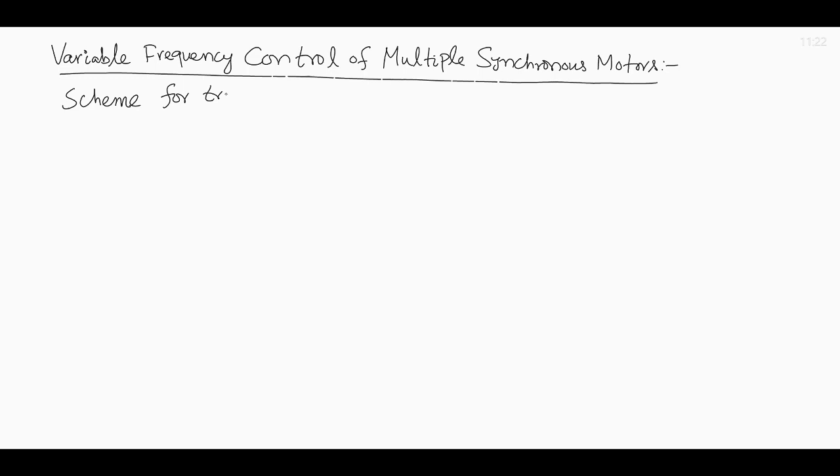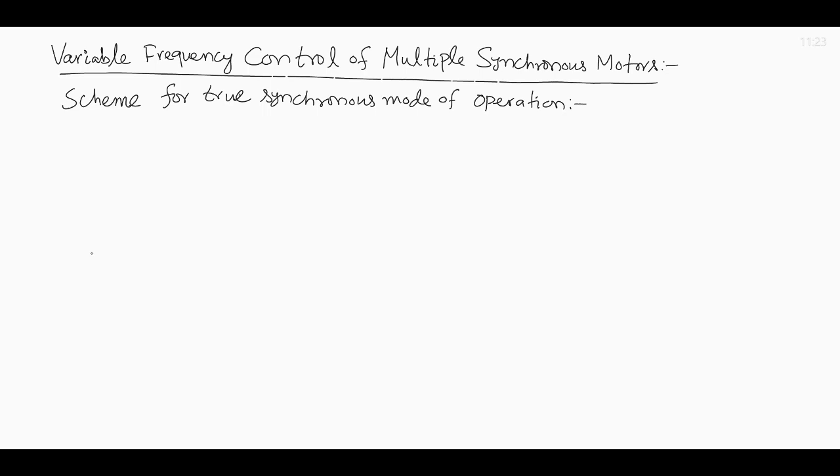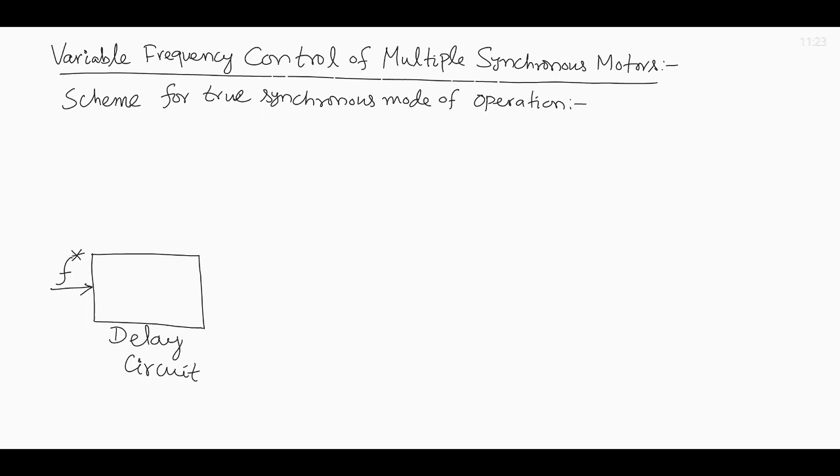So, first we will draw the scheme. This is the delay circuit receiving the command frequency from an oscillator. Delay circuit means it is basically a first order filter, and with the delay it is giving the frequency for control of the inverter.

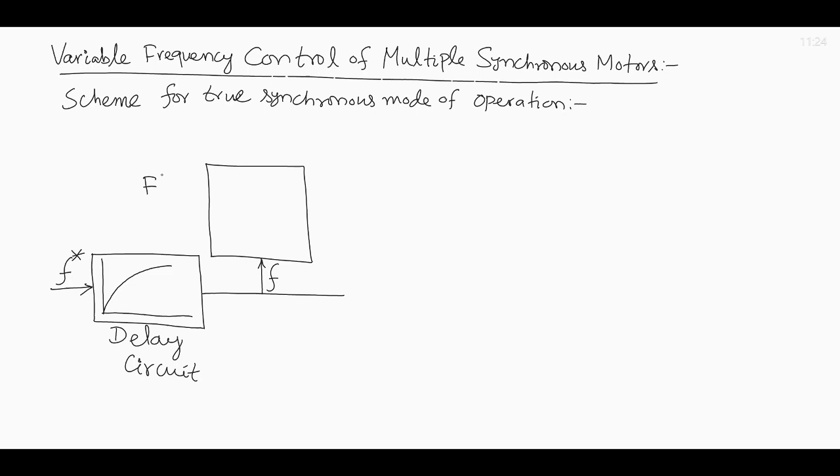Then this frequency f output from the delay circuit goes to the flux control block for V by F control. The characteristic is like this, and with that V by F control strategy, the V star command voltage is generated,

which goes to the rectifier control circuit. That generates the firing delay angle alpha for the rectifier, which takes the AC input and gives the DC output for the voltage source inverter. This is the voltage source inverter, which gets the current and DC voltage from the rectifier and getting the frequency command from the delay circuit. And we have the output of the inverter

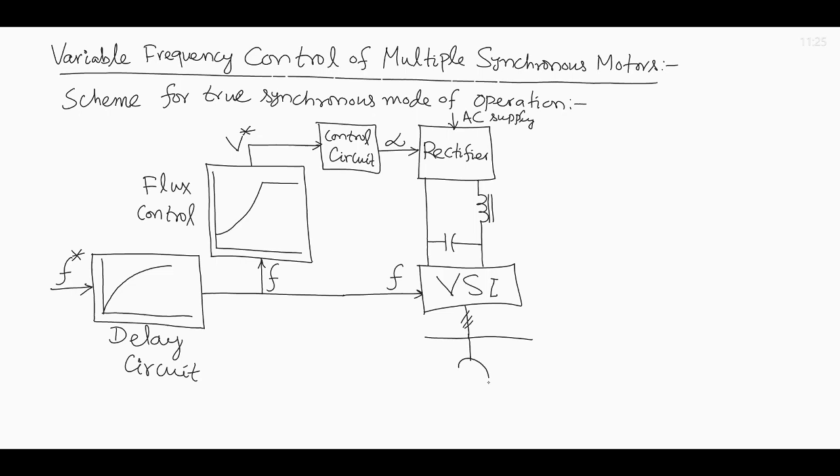feeds multiple synchronous motors like this. So, these synchronous motors can be synchronous reluctance motors, or permanent magnet motors. This is the scheme.

So, basically these multiple synchronous motors are required to run in synchronism in fiber spinning mill, textile mill and paper mill, and they use this scheme because accurate speed tracking is required, and several motors have to run in synchronism. The load is less, so synchronous reluctance motors or permanent magnet motors of smaller rating are used to run in synchronism, and they are controlled in this scheme.

And here the delay circuit, which receives the frequency command from the oscillator, gives the delayed frequency signal to the voltage source inverter, so that the rotor speed is able to track the changes in the frequency, so that true synchronous mode of operation is achieved, and also the voltage has to be controlled.

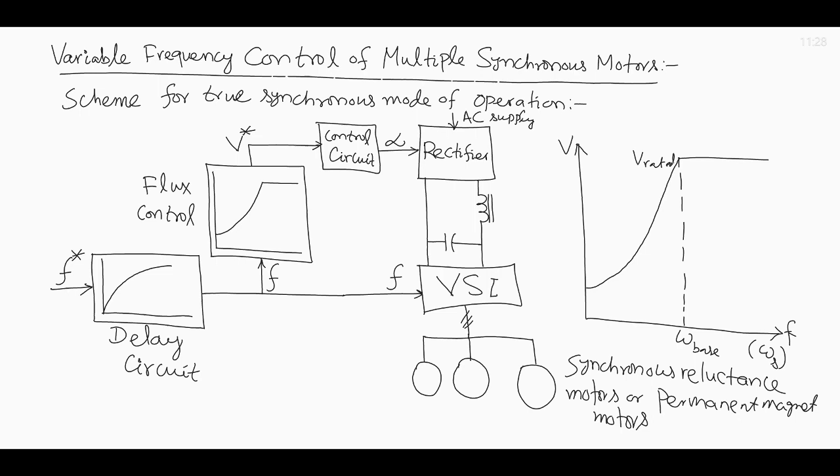The next one we will discuss is load commutated inverter fed synchronous motor drive.

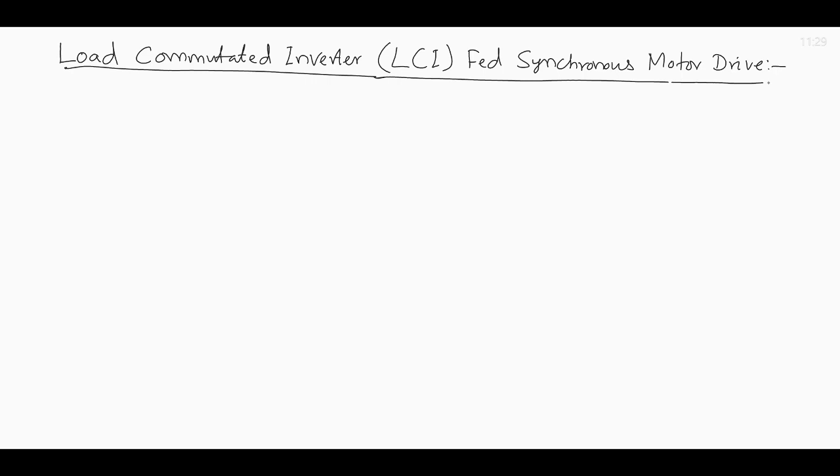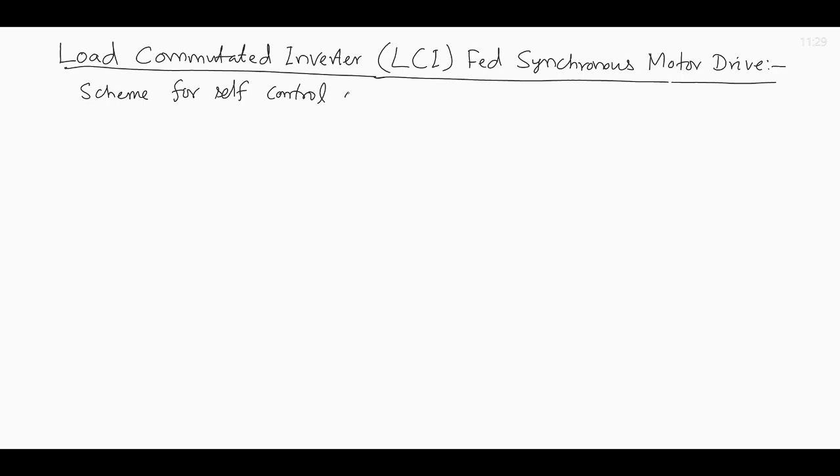Load commutated inverter is abbreviated as LCI, but it is not line commutation, it is load commutation. So we will draw the scheme for self control of synchronous motors with load commutated inverter.

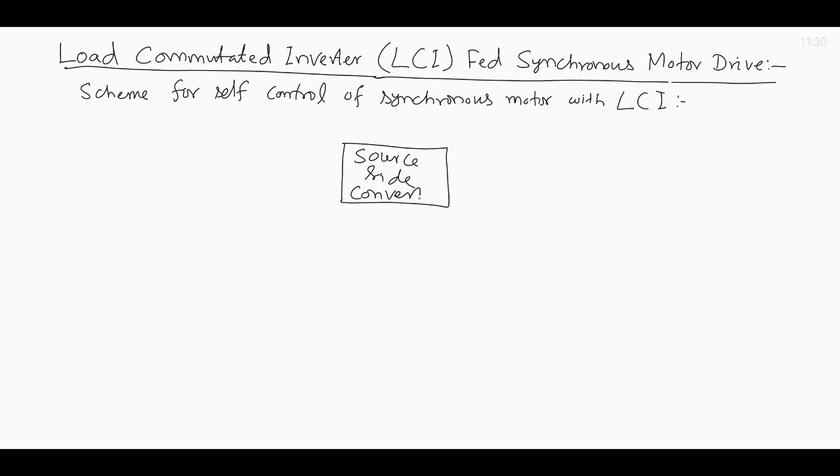We have the source side converter and also we have the load side converter. So, they are connected through a filter or DC link which feeds constant DC link current ID, and this is the AC supply

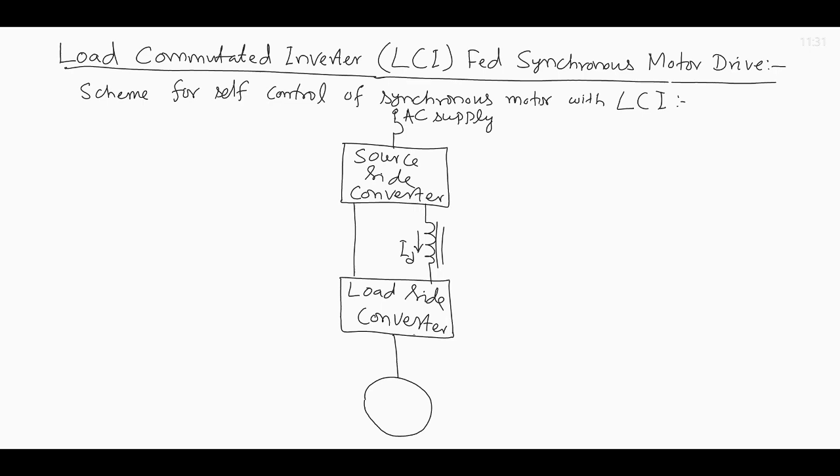for this is the machine, synchronous machine fed from the load commutated inverter, and it is wound field synchronous machine. The rotor gets separate DC supply.

For true synchronous mode, for self synchronous mode operation, there is a shaft position encoder mounted on the motor shaft. The shaft position encoder gives the rotor angle information theta e to the delay circuit.

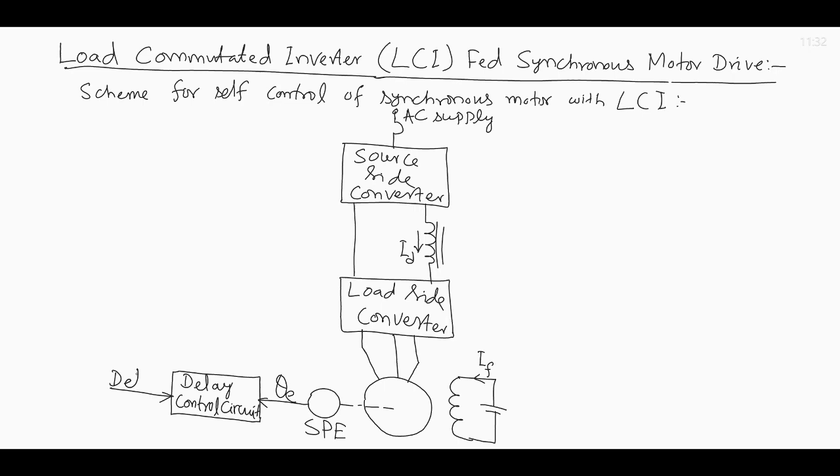Which also receives the delay command, and generates the firing pulses for the load commutated converter.

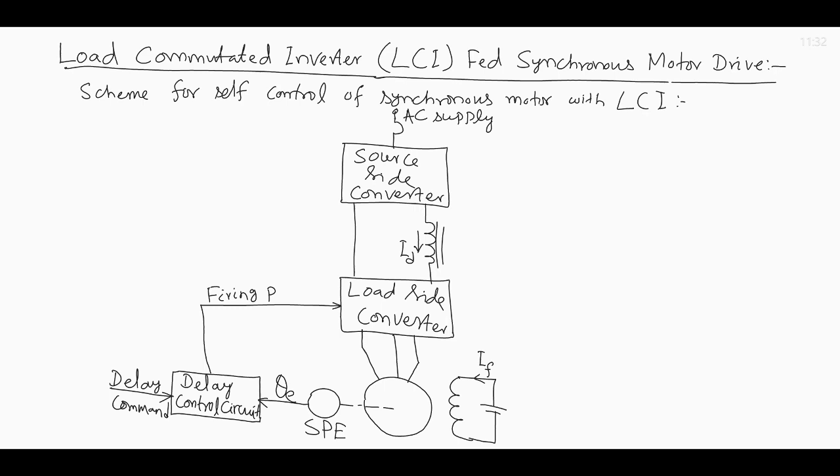For DC link current control, we have a command value or desired value of the DC link current, and we feed the current here. DC link current is taken as feedback and it goes to the control circuit, that gives the firing pulses to the source side converter. So, this is the scheme for self synchronous mode of operation of the load commutated inverter fed synchronous motor.

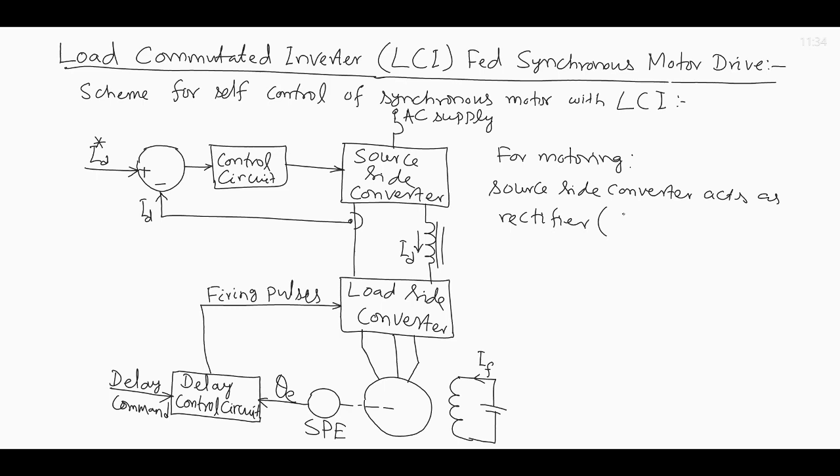So, for motoring operation, source side converter acts as rectifier, AC to DC rectifier. That means its firing angle alpha s for the source side converter is between 0 to 90 degree,

and the load side converter acts as inverter. That means its firing angle, that is alpha L for the load side converter, is between 90 degree to 180 degree. So, it rectifies the AC supply and feeds the DC current ID to the load side converter, and load side converter which is inverter makes it AC and feeds to the synchronous motor at variable frequency.

And here there is a shaft position encoder and delay circuit for the true self synchronous mode of operation of the load side converter. So, with this, the power flow for motoring operation is from the AC supply to the motor via the rectifier and inverter.

When the synchronous machine has to be braked regeneratively, that is generator operation or regenerative braking, the load side converter acts as rectifier and the source side converter acts as inverter. So direction of power flow reverses from the machine to the AC supply.

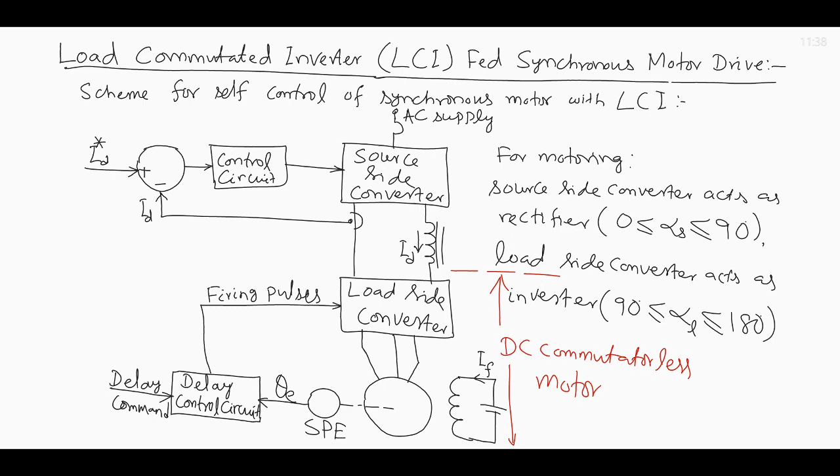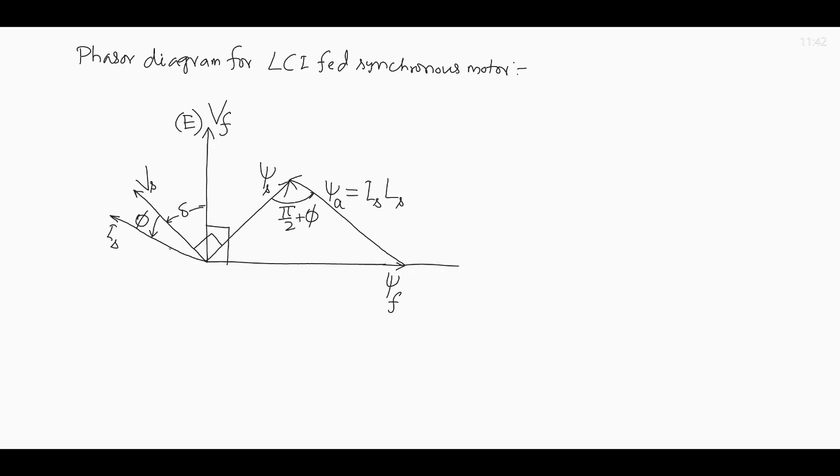The angle between psi A and psi S, this angle, you see, is pi by 2 plus phi, because the angle between psi S and psi A is pi by 2 plus phi. So the angle between psi A and psi S is also pi by 2 plus phi, and the angle between psi S and psi F is also the torque angle delta.

So this angle phi dash, as I have indicated, is pi by 2 plus phi plus delta, and this angle alpha, which I have indicated, is pi minus phi dash, that is pi minus phi dash equals pi by 2 plus phi plus delta, so it is pi by 2 minus phi minus delta, like this. So as I have already explained,

psi F plus psi A is psi S. The psi S phasor, which is rotating at synchronous speed, is the joint action of psi F, which is rotating at synchronous speed with constant magnitude, and psi A, the stator reaction MMF, that is Is into Ls, which is in phase with Is. Psi F is 90 degree lagging behind Vf or E, and psi S is lagging 90 degree behind Vs when the stator resistance is neglected.

So the angle alpha, as indicated here, is pi minus phi dash, and this alpha is the delay angle of the inverter. Alpha is the delay angle of the load commutated inverter.

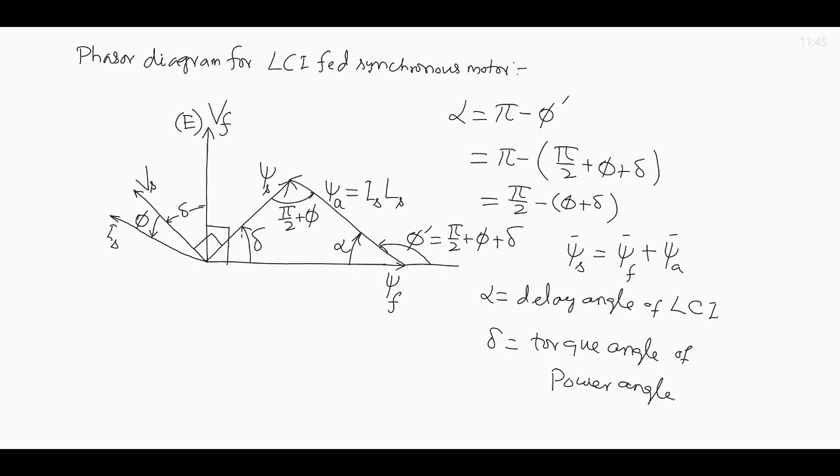Next, we will draw the phasor diagram for regenerative braking at unity power factor.

This is the stator voltage Vs, and opposite to it is the stator current Is, with phase angle 180 degrees. For a generator, the current is opposite to the voltage, unlike a motor, which is in the same phase as voltage for unity power factor. So for unity power factor of a generator, Is is 180 degrees opposite to Vs.

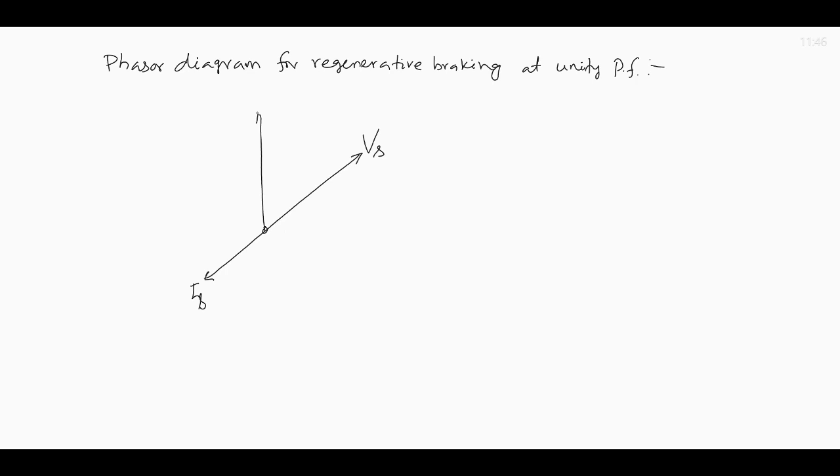Like the previous case, we take the voltage Vf or induced voltage E, which is at angle delta, the load angle, with Vs. The flux linkage psi F is lagging 90 degrees behind Vf, and flux linkage psi S lags 90 degrees behind Vs. This is psi S.

So flux linkage psi f for the field flux, which is rotating at synchronous speed, lags 90 degrees behind Vf, and stator reaction flux, armature reaction flux psi A, which is Is into Ls, is in the same phase with the stator current, in the same direction. The stator flux linkage psi s phasor is psi f phasor plus psi A phasor, and psi s lags 90 degrees behind Vs, as you can see here.

So the angle between psi f and psi s is also the load angle delta, and the angle phi dash - this is the angle phi dash - is 3 pi by 2 minus delta, as you can see. This angle is pi, and this angle is pi by 2 minus delta.

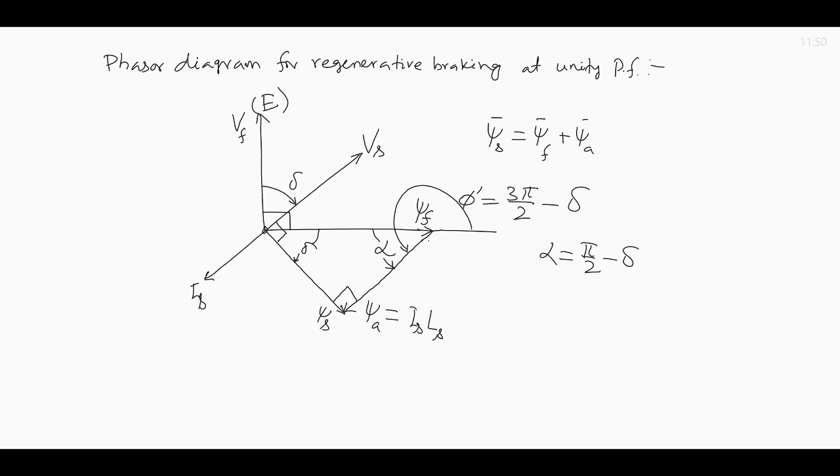Next, we will discuss self controlled synchronous motor drive with cycloconverter.

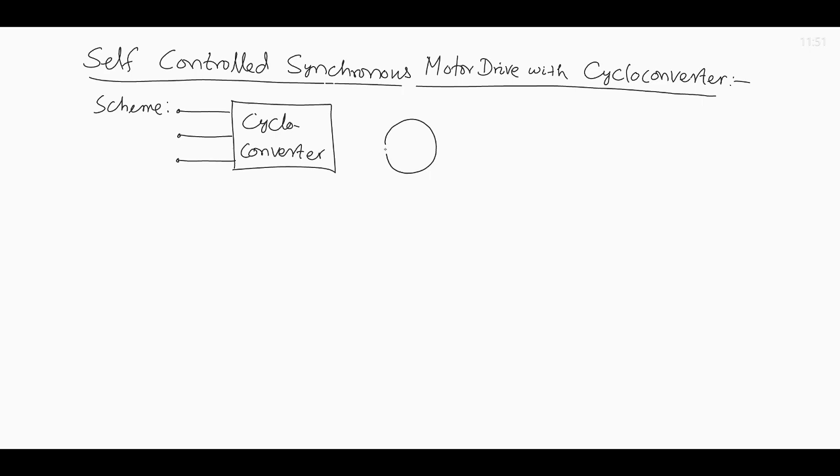So let us draw the scheme first. So we have a cycloconverter that takes constant frequency, constant voltage AC and feeds variable frequency, variable voltage AC to the synchronous motor, and the synchronous motor operates in self synchronous mode.

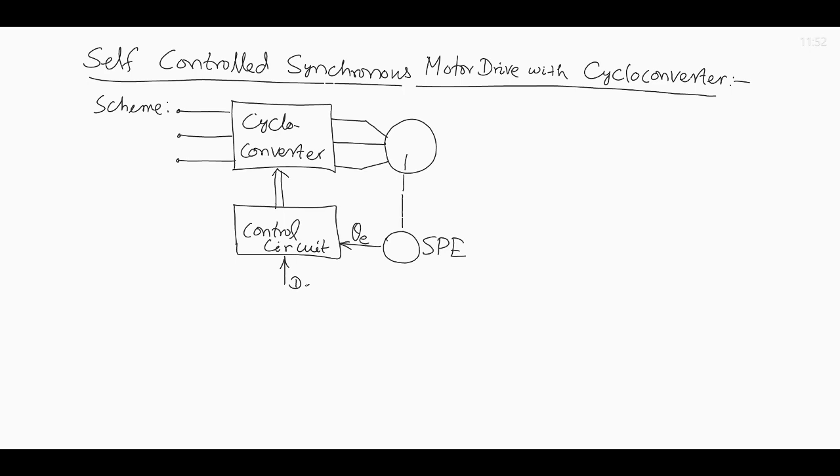So there is a shaft position encoder mounted on the rotor shaft, which gives the angle information, theta e, the rotor position information, to the control circuit of the cycloconverter, which generates the firing pulses for the cycloconverter. So there is a delay command for the control circuit, so that the frequency tracks the rotor speed in self synchronous mode.

So self synchronous drives, synchronous motor drives, you have already discussed. Here the cycloconverter output frequency is controlled from the control circuit through the shaft position encoder and rotor. That means the cycloconverter output frequency tracks the rotor speed, just like in self synchronous mode, through the shaft position encoder and control circuit.

So advantages of this scheme: smooth low speed operation, fast dynamic response, 4 quadrant operation, all motoring and generating operations are achieved with the cycloconverter. These are the advantages, and there are certain disadvantages.

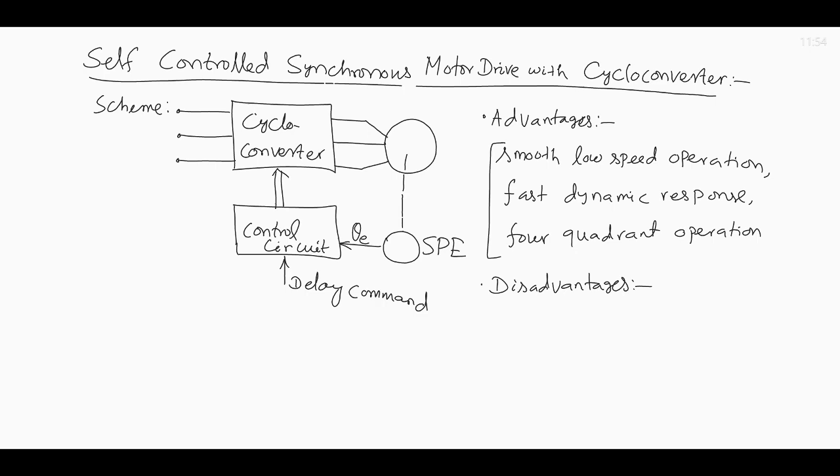Those are: first of all, speed range is low, meaning only low speed operation is achieved, because in a cycloconverter the output frequency can be maximum 1/3 of the supply frequency, to restrict the harmonic content in the output. So because the maximum output frequency is only 1/3 of the supply frequency, only speed control in the low speed range is obtained. And another problem is the cycloconverter uses a large number of thyristors.

So it is suitable for high power application, high power drive.

And another point, a synchronous motor without damper winding must be used, because damper winding reduces the inductance of the machine and therefore its ability to filter out the harmonics in the output voltage of the cycloconverter. When machine inductance is high, it reduces the harmonic content being fed to it, but in a synchronous motor with damper winding, the effective inductance is reduced, so it is not suitable for filtering the harmonics of the cycloconverter.